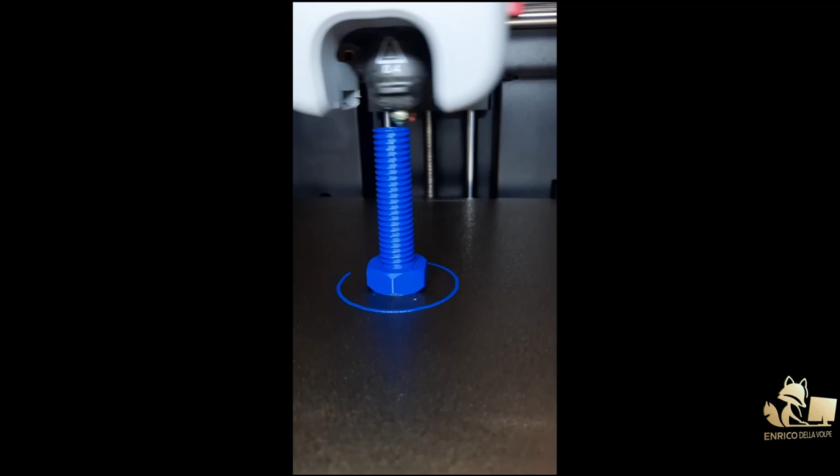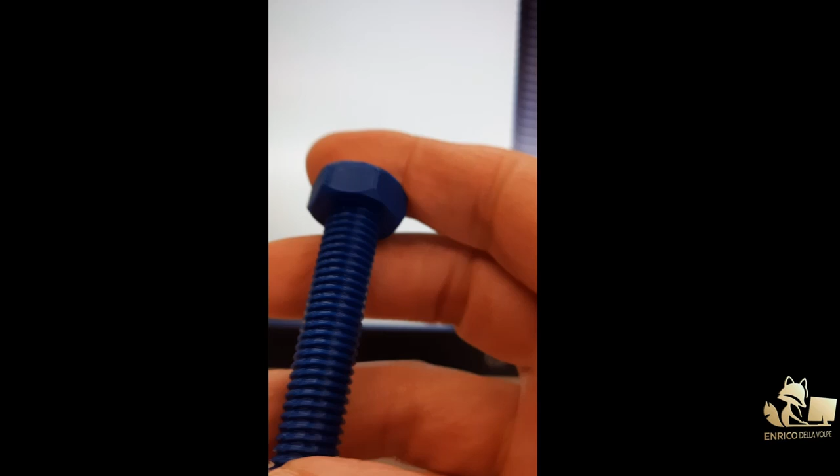Today I will show you how to design and 3D print this custom M12 bolt using Autodesk Fusion 360. So let's get started. First of all, select the bottom plane and sketch a polygon. It will be 6 edges starting from the cross axis. Using a vertical constraint, I make the side vertical and make a dimension of 19 millimeters.

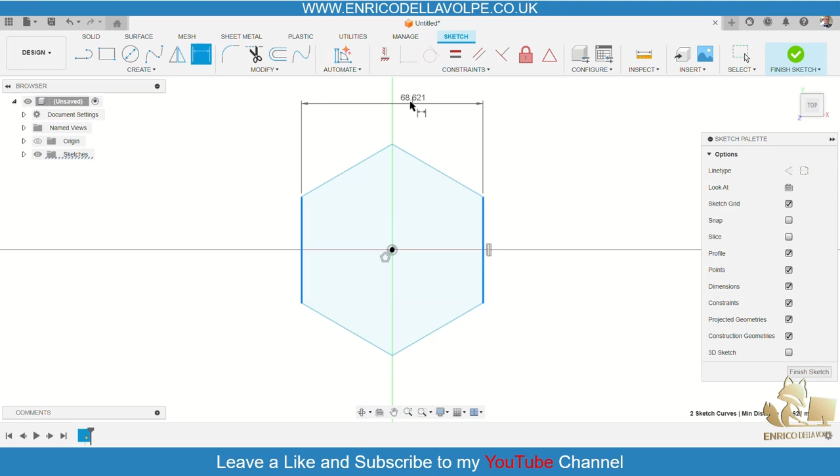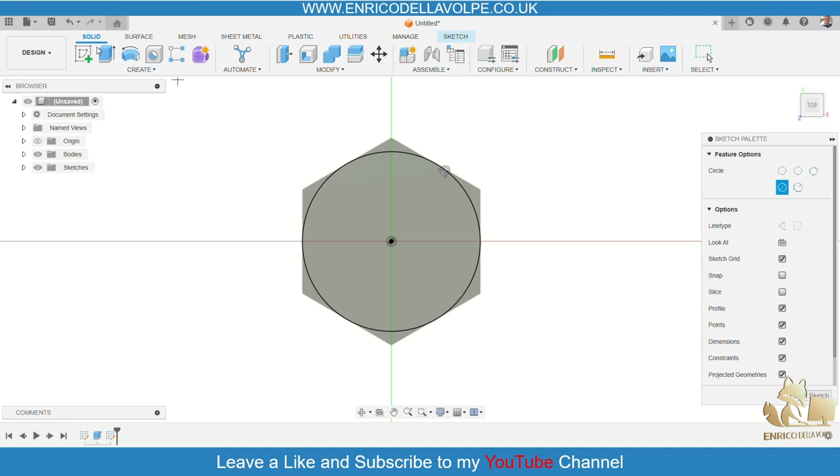Now go to extrude and make it solid for 7.5 millimeter height and click OK. To make a nice chamfer, select the front face. Pick the Circle command and sketch a circle tangent with the edge. Go to Solid, Extrude, and select the intersection operation.

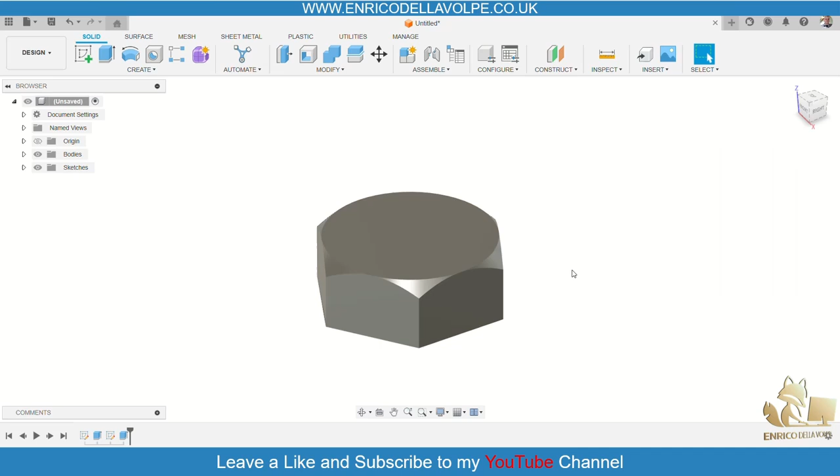Give 45 degrees taper angle and extent type through all. And we have a chamfer for the surface. Let me repeat for the other face.

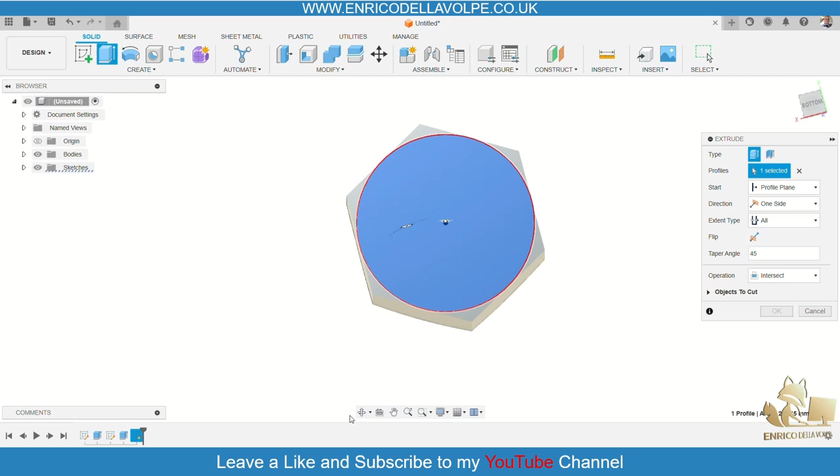So select again the face, pick a circle, make it tangent, and solid extrude command, intersection, 45 degrees and distance through all, and click OK. Give the direction, again distance through all, and click OK.

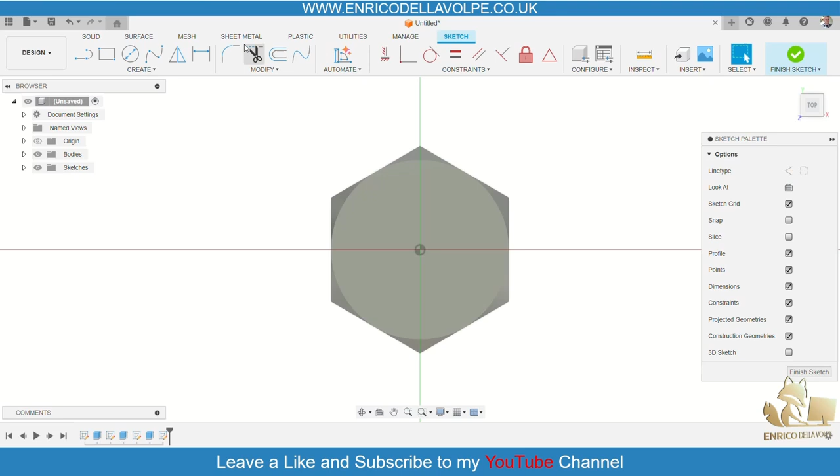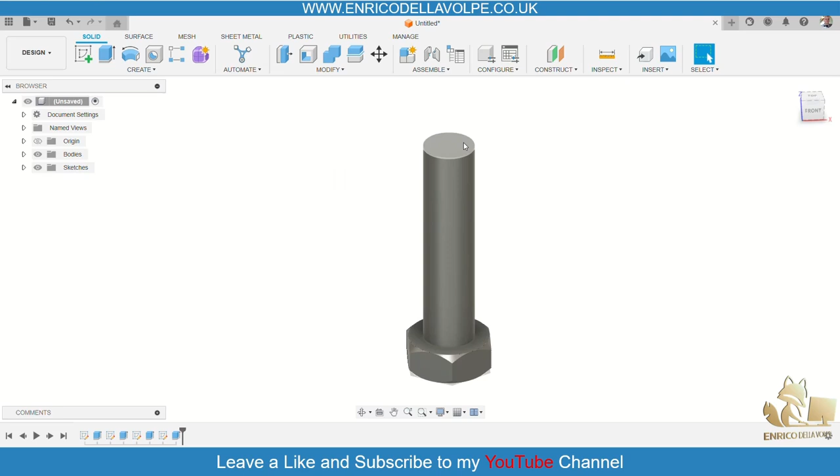Now time to create the shaft. Let's select this face, and because we are making an M12 bolt, we sketch a circle of 12 millimeters. Go to the Extrude command and extrude for 50 millimeters. OK. Now is the time to add the thread to make this a functional bolt.

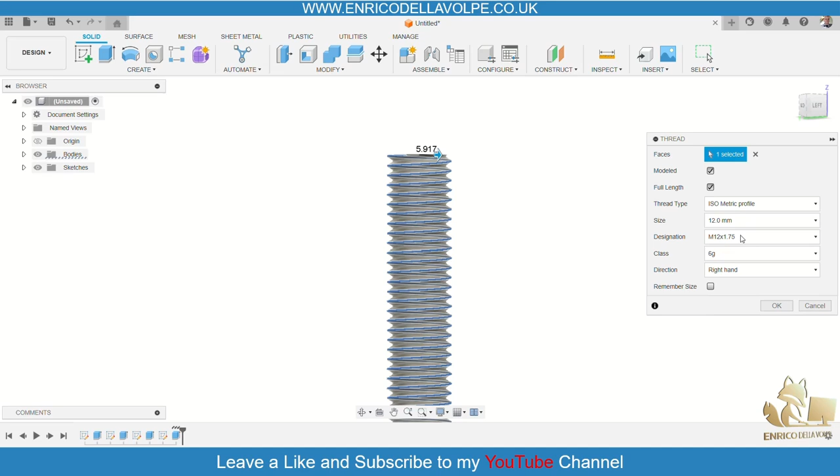Let's see if everything is perfect. Rotate and go to Create, Thread, select the cylindrical part, click on Modeled, make sure the size is 12 mm, and I will pick M12 by 1.75 mm. And the thread is done. Let's rotate, check if everything is perfect,

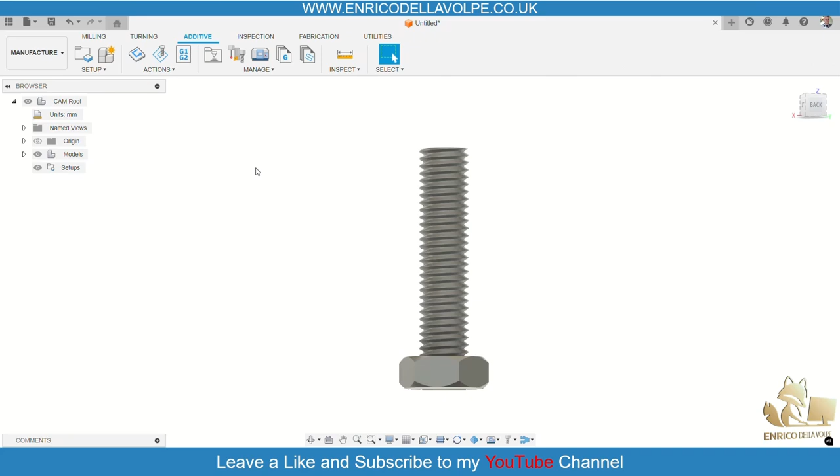and let's go to prepare for the 3D printing. Go to Manufacture, then select Setup, New Setup, click on the bolt and OK. Go to the library and pick our 3D printer. I will go to Flashforge Creator 4, but you can pick whatever you have.

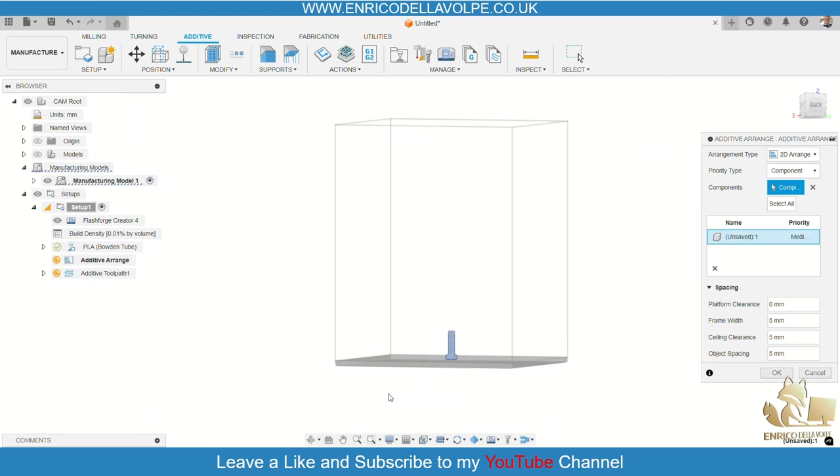Click OK, select the material, I will take PLA filament, and the bolt is inside our 3D printer, perfectly in the middle. So let's rotate to check whether there is a gap with the bottom of the 3D printer, but everything worked perfectly.

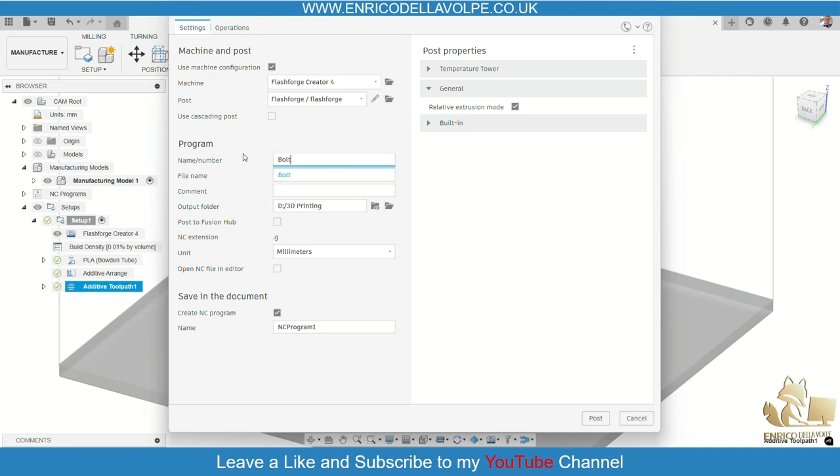What we have to do now is generate the toolpath, so right click and generate, and we will have the toolpath for the 3D printer. Let's wait a few seconds, and again right click and post process to save the file. Go to the location where we want our file saved, name it, in my case I will call it bolt, my location is at the 3D printing folder, and download the file. Click on it and we can check that our G-code is ready.

What we have to do now is go to the location where we saved the file and just send it to the 3D printer through Wi-Fi, or copy and paste to USB and upload into the 3D printer. And wait for our bolt to be created.